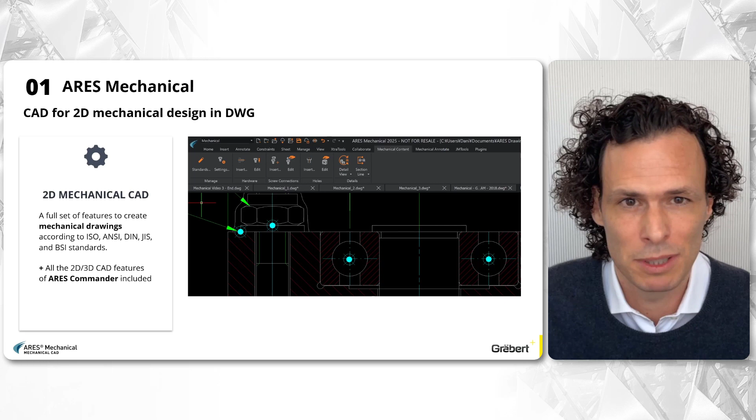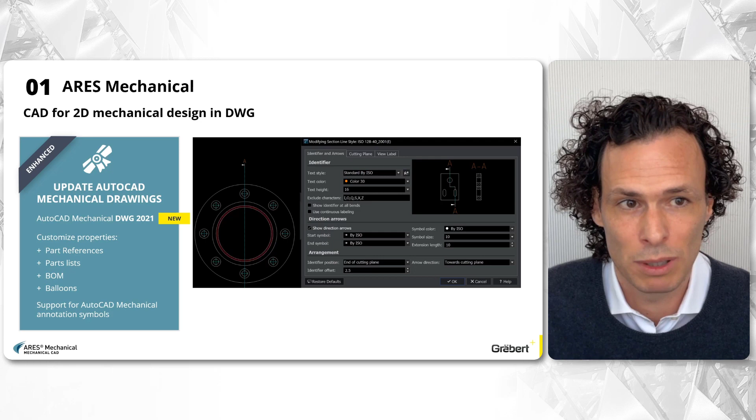Ares Mechanical is Graebert's solution for mechanical design that combines powerful DWG features based on Ares Commander and a full set of industry-specific features to quickly create or modify existing 2D mechanical drawings. Ares Mechanical can be used to maintain legacy mechanical drawings created in AutoCAD Mechanical and now supports up to AutoCAD Mechanical DWG 2021 file formats.

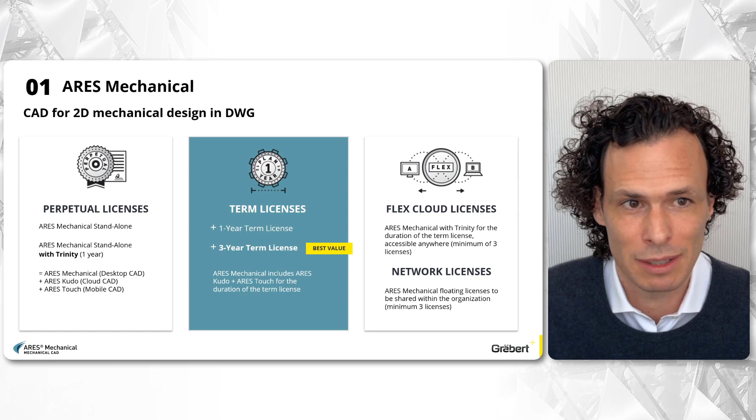A wide range of licensing options are available, including subscription, perpetual, network, or flex cloud licensing. The cost of Ares Mechanical is roughly 3 to 4 times lower than AutoCAD. Ares Mechanical is available for Windows 64-bit and in 5 different languages: English, German, Japanese, Korean, and Polish.

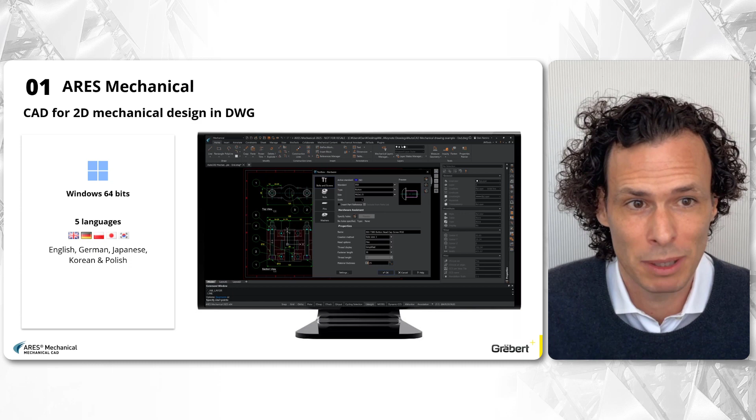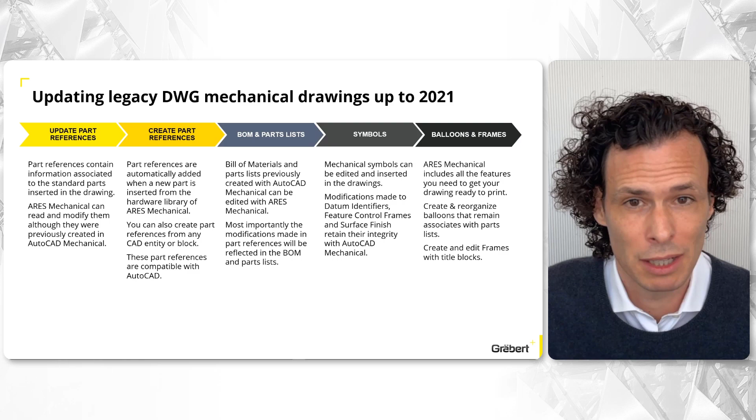Let's move on with some of the feature highlights included in Ares Mechanical. As previously mentioned, Ares Mechanical can now open and edit AutoCAD Mechanical entities. From this new release, we now support AutoCAD Mechanical DWG files up to 2021. This is important because Ares Mechanical offers an affordable and practical way to continue to work with these mechanical drawings created in AutoCAD Mechanical without being forced to use only one CAD product.

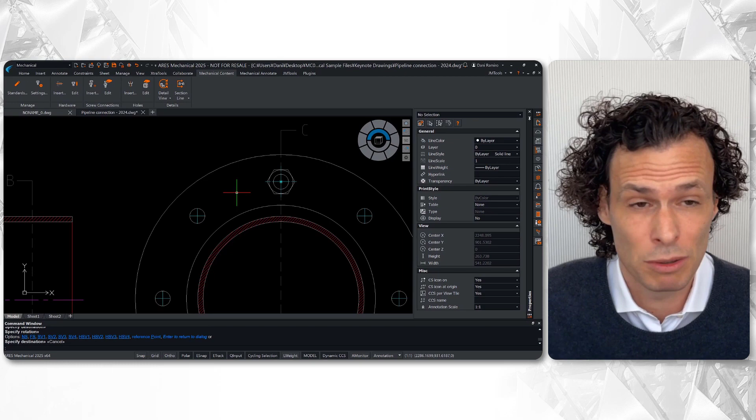Once the DWG is loaded, existing part references, part lists, bills of materials, balloons, and symbols are natively supported and are fully compatible with AutoCAD Mechanical. Our customers commonly need to update part information, part references, and produce updated drawings. With Ares Mechanical, these legacy files can be updated and maintain their compatibility with AutoCAD Mechanical when saved. We will dive deeper into these highlights later in the presentation.

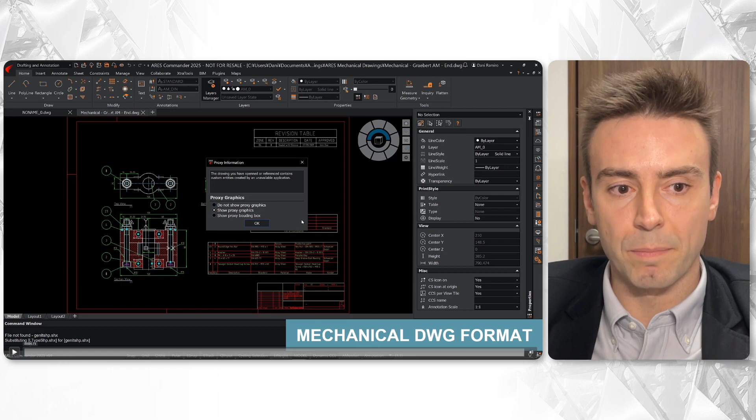It is important to note that standard DWG files are actually different from AutoCAD Mechanical DWGs, as the latter contain special types of entities. Danny, can you elaborate a little bit more on this aspect? Sure, let's look at an example. Opening an AutoCAD Mechanical DWG in standard DWG programs like vanilla AutoCAD will prompt that there are special custom entities in the file. As the source application is not present, the custom objects are turned into proxy entities.

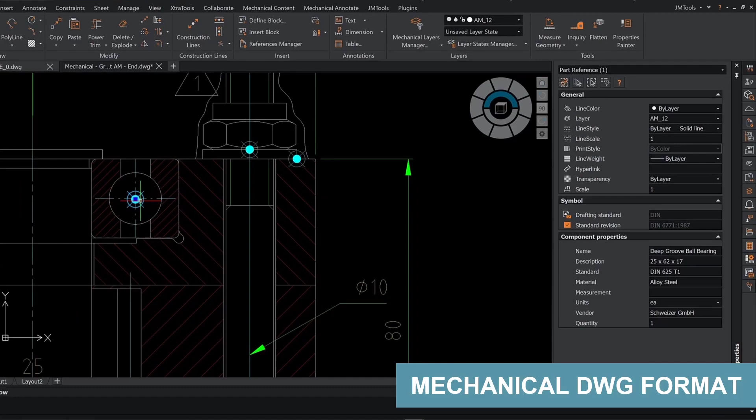While standard programs may not display part properties, Ares Mechanical recognizes these special types of entities, including their properties. These smart objects are beneficial for mechanical design, but they exist separately from standard DWG files. Ares Mechanical ensures compatibility with AutoCAD Mechanical for modifying and creating mechanical entities.

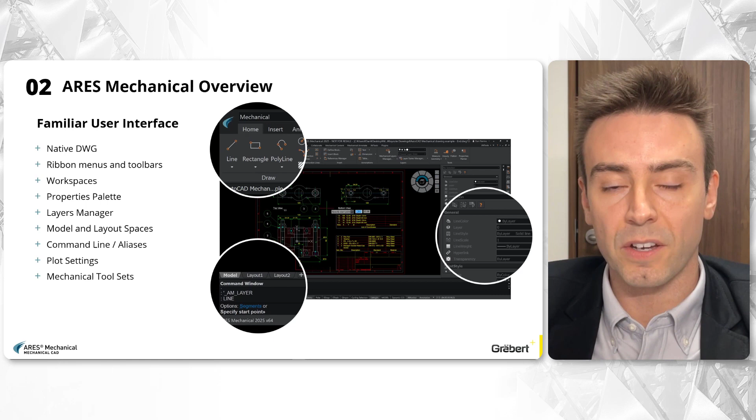Okay, with this explanation of the mechanical objects out of the way, let's continue with an overview of Ares Mechanical product features. Dani, please go ahead. Since Ares Mechanical is based on Ares Commander, it offers the same familiar user interface and all the features you may expect, such as working with ribbons or toolbars, workspaces, the command line, and much more. Ares Mechanical also offers a wide variety of compatible file formats, including native support for DWG, AutoCAD Mechanical DWG up to 2021, PDF, and some of the most common 3D file formats such as STEP and IGES.

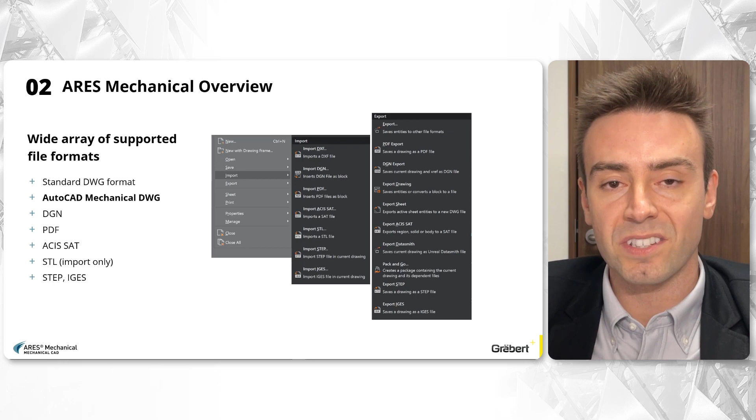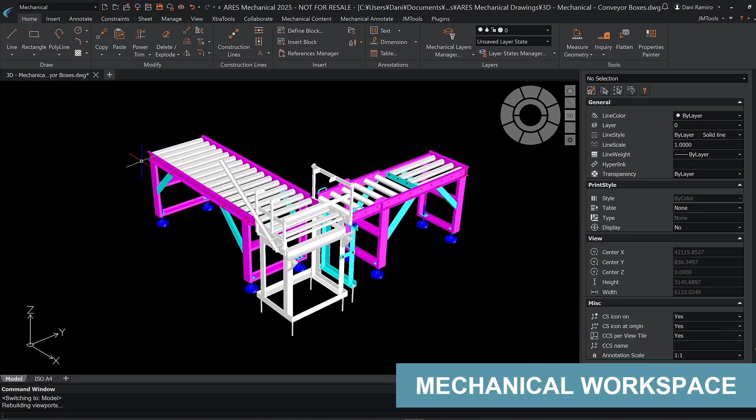Would you like to add something, Robert? Sure. Ares Mechanical includes a mechanical workspace that contains a specialized set of tools for mechanical design. These standardized tools are crucial to keep consistency across design, drawings, and manufacturing processes. And since these tools support AutoCAD Mechanical DWG files, it enables seamless interoperability without compatibility issues, facilitating collaboration and integration.

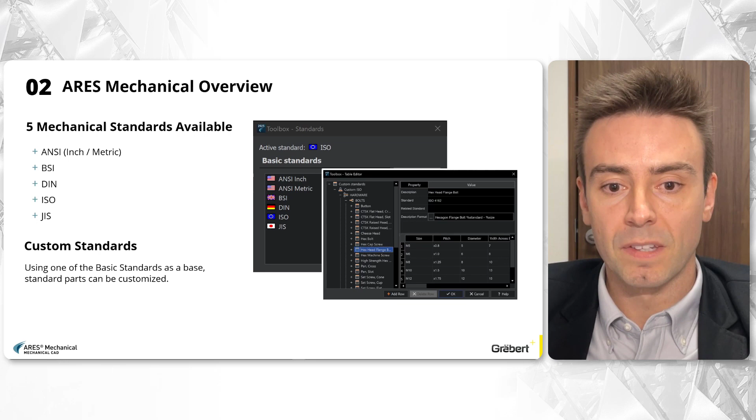Thanks, Robert. Using mechanical standards offers great benefits, such as consistency, efficiency, and cost reductions, minimizing errors. With that in mind, Ares Mechanical assists with the creation of mechanical drawings according to all the leading standards, including ANSI, both imperial and metric, ISO, DIN, JIS, and BSI. Additionally, you can create custom versions of the standards for your company.

Ares Mechanical includes a layers manager and the support for layers groups. Layers will be automatically created and organized as required in the standard chosen for your drawing. Can you tell us a bit more, Robert?

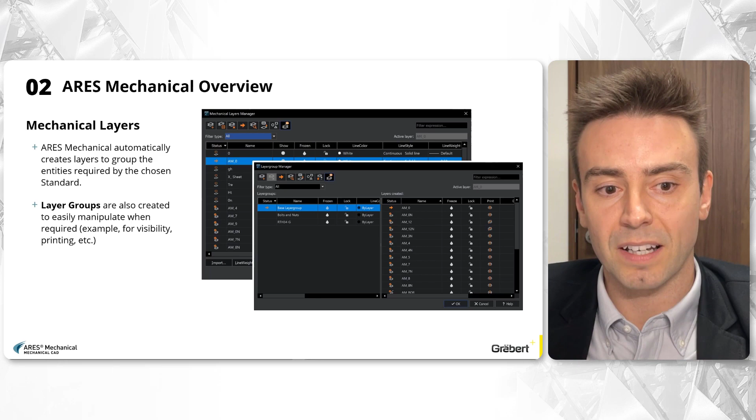Sure. The support for layer groups is also included for compatibility with legacy AutoCAD Mechanical drawings, where this feature is commonly used to separate layers by parts. All the common layer manipulation operations are available, and you can convert a selected layer into a mechanical layer.

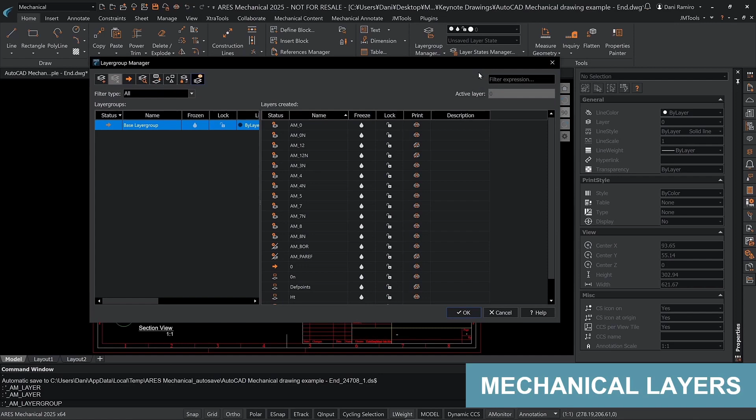These mechanical layers offer significant time savings as they simplify the process to show or hide elements and groups for printing. Besides, you can import such layer settings and properties from another drawing template, or layer settings configuration file.

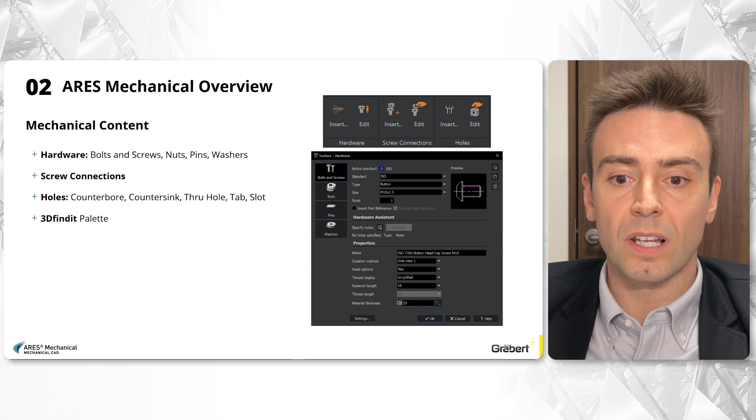Thank you. As previously said, having a standardized mechanical content for mechanical design and manufacturing offers several benefits, such as consistency and efficiency. Ares Mechanical includes standard mechanical parts to produce accurate drawings, such as hardware, screw connections, and different hole types. Users can also leverage thousands of mechanical parts using the 3Dfindit palette.

Here, we will have a look at the different hardware options available. Users can choose between bolts and screws, nuts, pins, and washers. In this example, we will insert a heavy hex bolt, selecting the appropriate size using the near side view and typing the material thickness. We can also choose to insert a part reference at the same time.

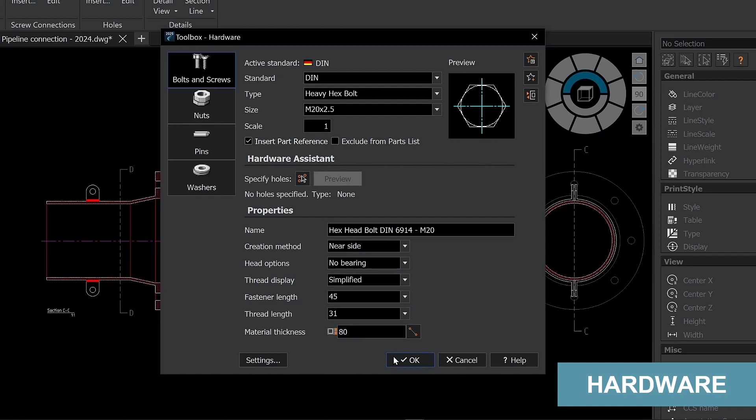In addition, users can add their preferred parts to the favorite library for easy access. Now, let's go ahead and insert the bolt, noting that a part reference has also been inserted.

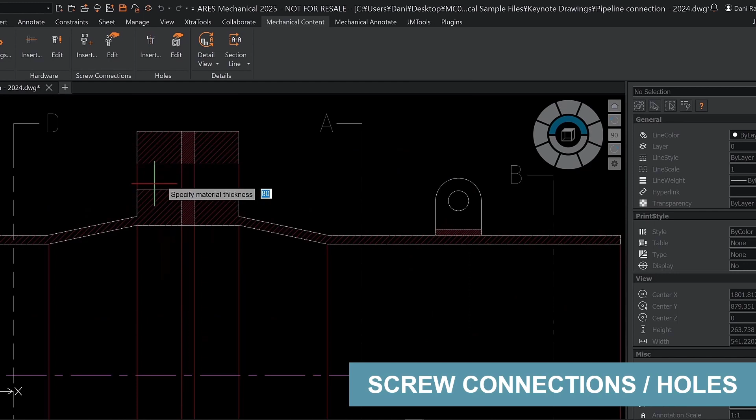Screw connections can also be inserted following similar steps. We select the type, size, the thickness, but this time selecting 2 points, and the fastener's length. Screw connections can also be configured to include or exclude its washers and nuts, and even choose to insert part references. In addition, we can add hole entities to show, for example, where to drill plates. Holes can also be created in a top or side view.

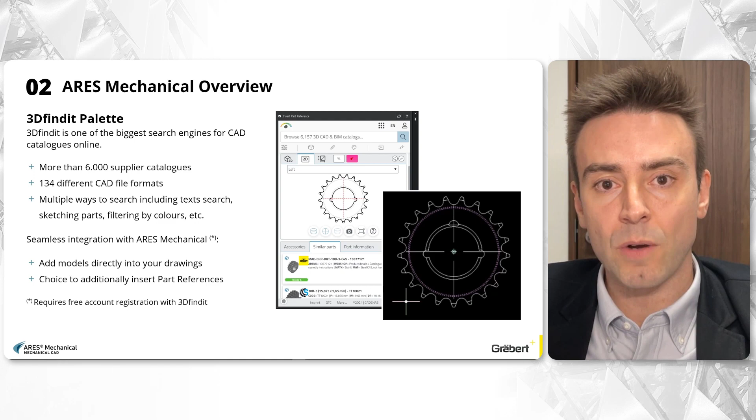3Dfindit is one of the world's most popular visual 3D search engines for manufacturers' components. Users can find the parts they need in seconds from thousands of catalogs. There is no need to browse through thousands of manufacturer websites or catalogs. You can harness 3Dfindit's powerful search tools via the 3Dfindit palette directly inside Ares Mechanical.

Use your 3Dfindit account and start exploring part catalogs from all over the world. Then insert different views directly to your drawings, and even with the choice to insert a part reference at the same time.

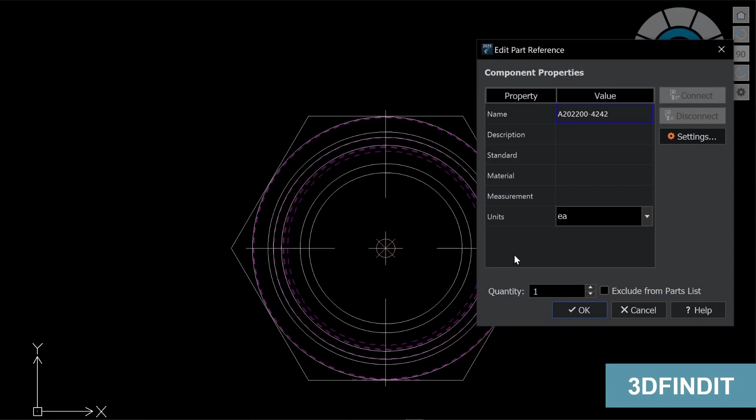Great. Let's continue with mechanical annotations. Mechanical annotations play a very important role in communicating vital information throughout the design and manufacturing process. These are also providing clear and precise instructions that help to prevent misinterpretation and reduce the risk of errors during the manufacturing process. Ares Mechanical includes different standardized mechanical annotations that can be read and modified with AutoCAD Mechanical. Dani will further explain how these mechanical annotations work.

Let's start with part references. Part references are represented using blue points. We can edit part references coming from AutoCAD Mechanical. Furthermore, clicking the Settings button will allow us to customize the fields, adding, for example, the vendor. It is also possible to customize any of the display prompts or descriptions. These modifications will be seamlessly interpreted by AutoCAD Mechanical when saved.

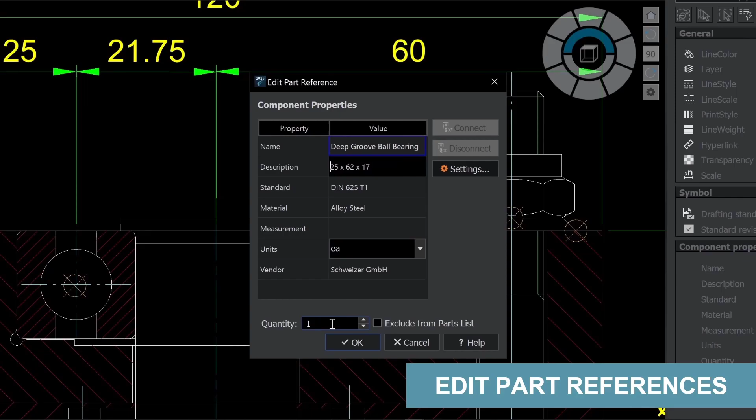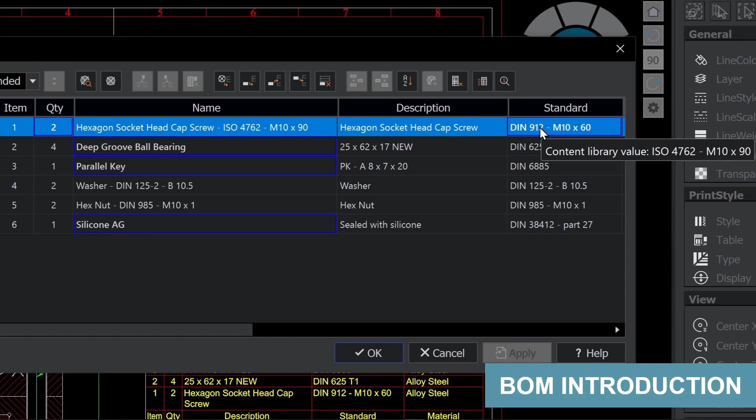In some cases, there is a good reason for that. For instance, our drawing follows the DIN standard, and this part was inserted with the ISO reference, so we entered the DIN equivalent. Similarly, we want to keep the same name overrides because originally these were empty.

To continue, let's insert an item directly inside the BOM. We will add a new row to include the bearing housing, then select the row, then we click on Create Part and select the entity. The part reference is inserted. We haven't talked about balloons yet, but these can also be created directly from the BOM.

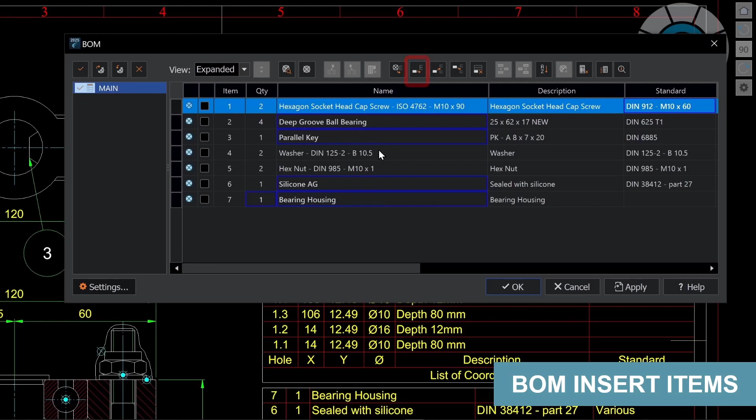Items with no part refs linked can also be added to the BOM, such as painting in this example. Other handy features include import and export to CSV, add or remove columns, and highlight geometry associated with the BOM.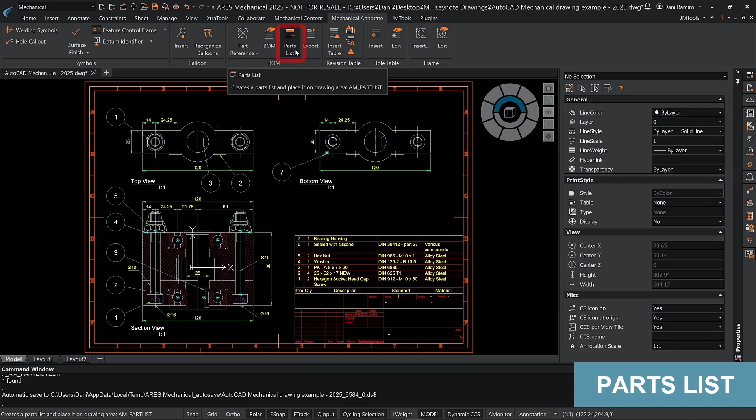Okay, so after configuring our BOM, let's have a look at the parts list. You can insert the parts list using the feature in the ribbon, but in this drawing, the parts list is already inserted, so we double-click on it. To begin with, we will insert the name and the vendor columns that I see are not showing.

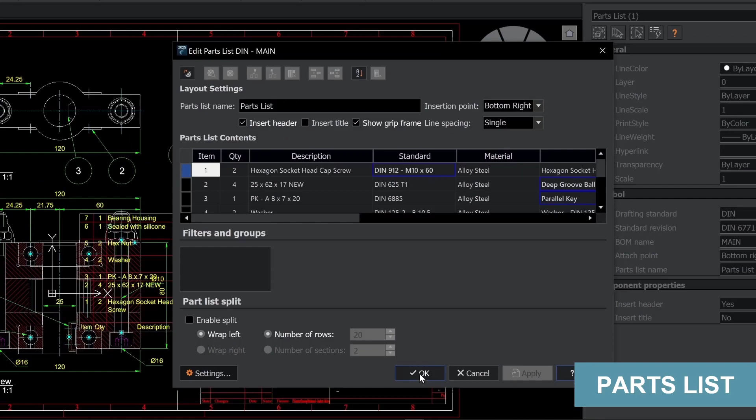Note that we can only insert columns for fields enabled in the parts reference dialog box. Settings can also be customized, such as the insertion point, text, and margins. Modifications made in the parts list dialog will be highlighted with a blue border, as we will be overriding the original values described earlier.

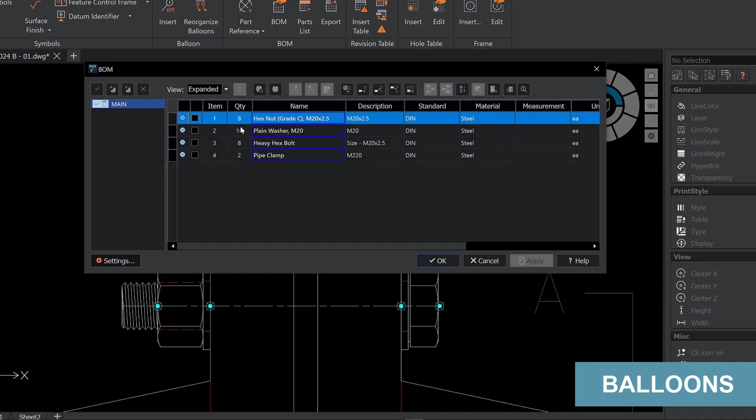Next, let's talk about balloons. There are several ways to insert balloons. You can select part references one by one, or you can create multiple ones using the Insert Balloon command. From the BOM, you can also create balloons for included part references. Once inserted, these balloons can easily be reorganized, and their type and arrowheads can be customized to align with various standards, as you can see in this video.

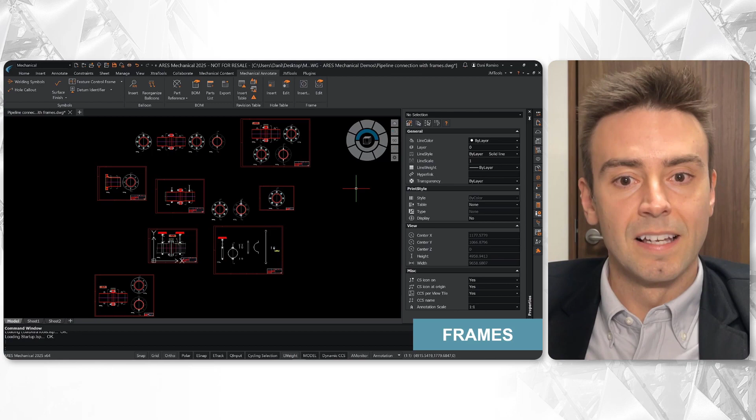Okay, next let's talk about frames. A mechanical drawing, just like any technical drawing, needs to be represented with sheets that will be configured for printing. Sometimes draftspersons are used to working with multiple frames in the model space for better organization. When creating a new frame, the standard will be automatically selected. We can select the frame paper size, title block, or preferred scale from the list of options.

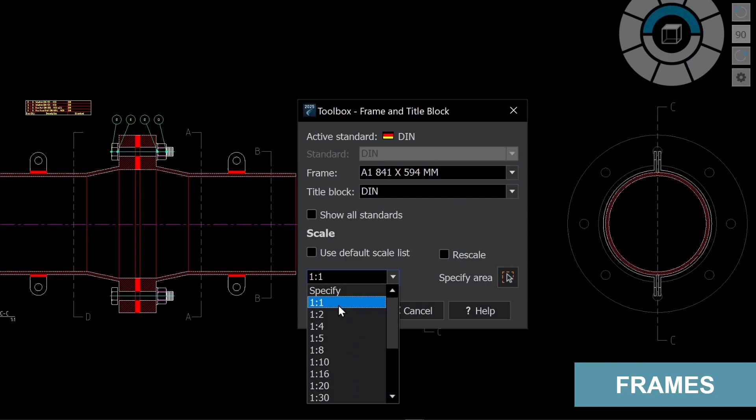When inserting, a dialog will appear to enter the title block details. Users can also edit already inserted frames, such as changing the frame size or scale. It is also important to note that layout views can also be created, as shown here.

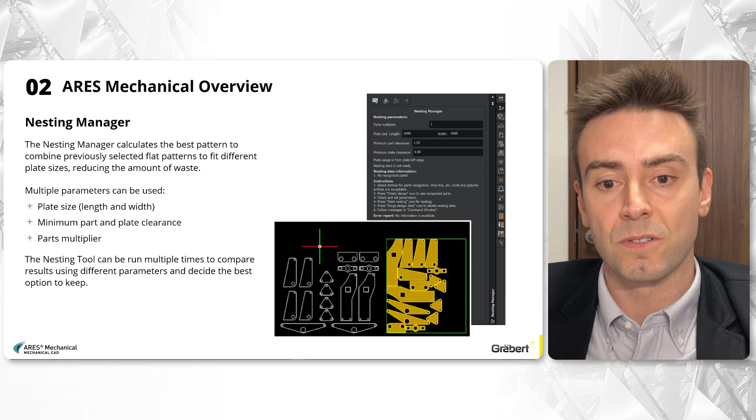Now, let's talk about the Nesting Manager. Traditional 2D CAD software relies on manual methods for preparing drawings for metal cutting, but the Nesting Manager offers precise automated nesting, minimizing scrap and optimizing part placement. It's user-friendly, handles complex nesting efficiently, automatically creates multiple copies with the part multipliers option, and supports various sheet sizes for comparison. Now, let's see how it works.

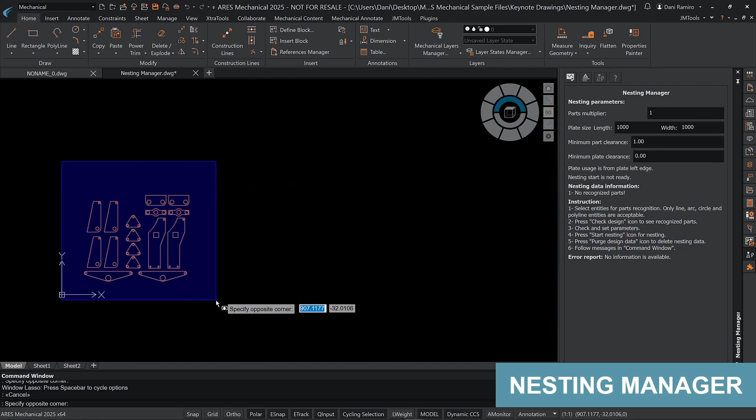Since many shops have a variety of custom plates in stock, it can be tedious to create a nesting setup for every job. The Nesting Manager makes it easy to find the best solution by creating multiple nestings. Now we select the parts, then configure the plate length to 500 by 600, leaving the minimum part and plate clearance values as 1 and 0 respectively. Then we click on Check Design to verify the nesting is possible and start nesting. In a few seconds, the first option is ready.

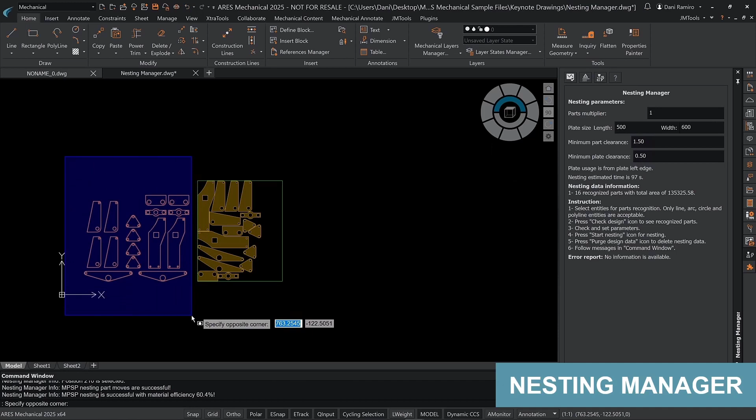Next, we select the parts again, now setting the plate as 400 by 800. Then we click on Check Design, and then we start nesting again, and in a few seconds we will see the second option ready. Users can then choose the best option for them.

All right, thank you, Dani, for giving us an overview of the Ares Mechanical product features. There's a lot. Now let's focus on the new features we're actually shipping with Ares Mechanical 2025. The team has been busy, and you will see we continue to bring new productivity tools to the product.

Thank you, Robert. With the new features, we will start by mentioning again that Ares Mechanical now supports AutoCAD Mechanical DWG files up to 2021. This means that mechanical entities such as part references, symbols, BOM, etc. can be opened and modified in Ares Mechanical and vice versa, maintaining the legacy data.

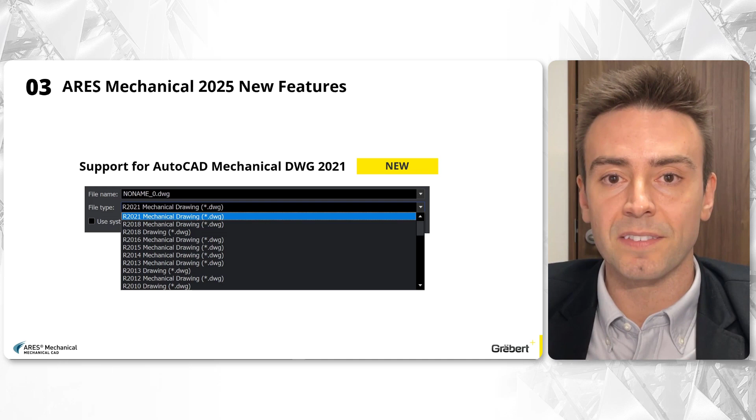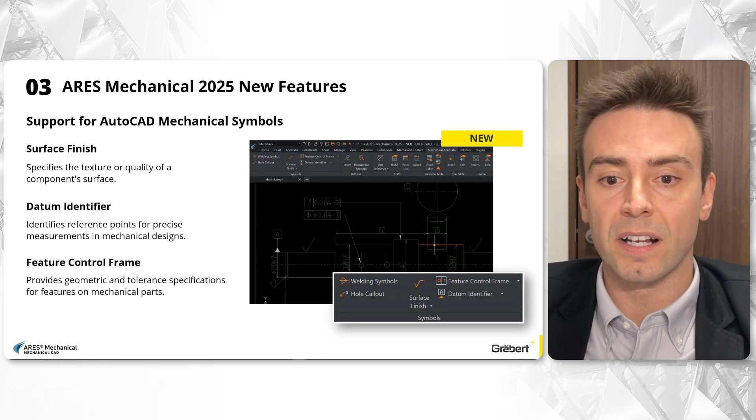Mechanical symbols are essential elements in engineering drawings. Surface finish symbols specify surface texture. Datum identifiers establish reference points for measurements, and feature control frames provide geometric and tolerance specifications for specific features, ensuring precision and functionality in mechanical designs. Ares Mechanical 2025 now supports AutoCAD Mechanical DWG files that include these types of mechanical symbols, as we will show.

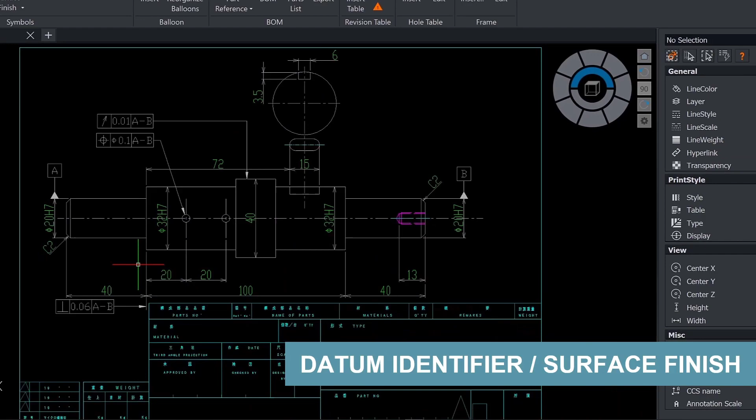In this demo, we have received the drawing of a shaft created in AutoCAD Mechanical. First, we will attach a datum identifier to the 20 mm diameter dimension. We can also customize the settings as we wish, such as the arrowhead, text height, etc. Next, we will add a new surface finish symbol to the same cylindrical feature, denoting a roughness average of 6.3.

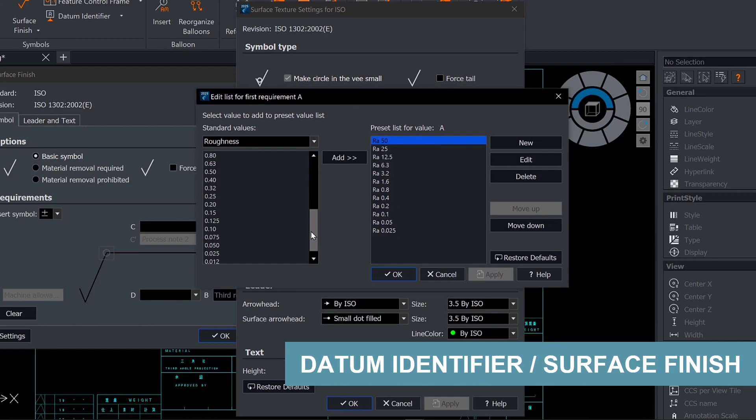In the Settings dialog, other parameters can be configured, including customizing the preset lists for surface finish requirements. We are adding new symbols to the drawing, keeping in mind that symbols created in AutoCAD Mechanical can also be modified.

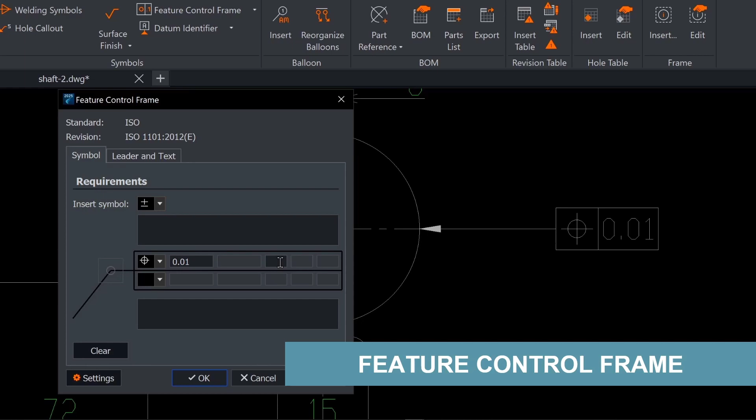We continue by inserting a feature control frame to the cylindrical feature viewed from the front. In the dialog, we select the position symbol from the drop-down list, type a tolerance value of 0.01, then input datum references A and B used to establish the orientation of the feature being controlled. Feature control frames created in AutoCAD Mechanical are now supported and can be modified.

Ares Mechanical 2025 will also now recognize detail views and section lines created in AutoCAD Mechanical, letting users modify or create their own.

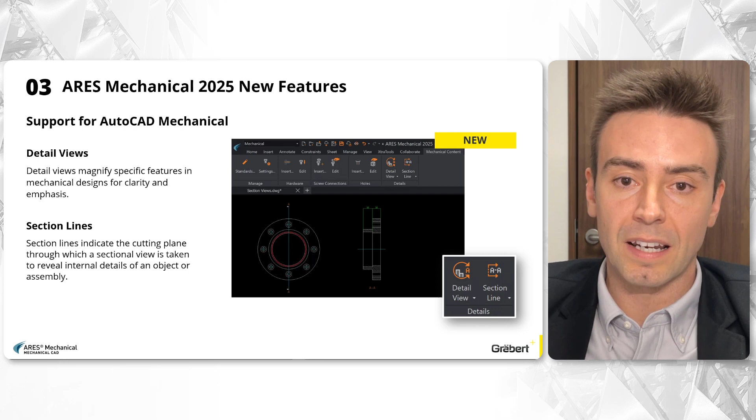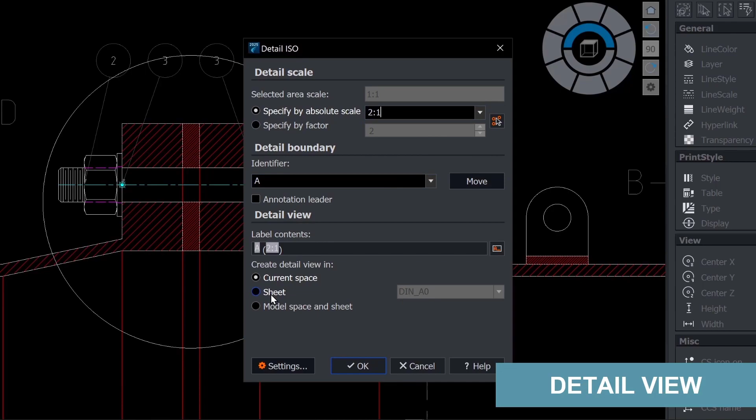Detail views serve as magnified snapshots that focus on specific areas of a mechanical component or assembly. By isolating specific regions or components, detail views facilitate clearer communication of design intent. In Ares Mechanical, users can now create or modify detail views previously created in AutoCAD Mechanical, setting the scale, identifiers, and whether to add it to the current space, available sheets, or both.

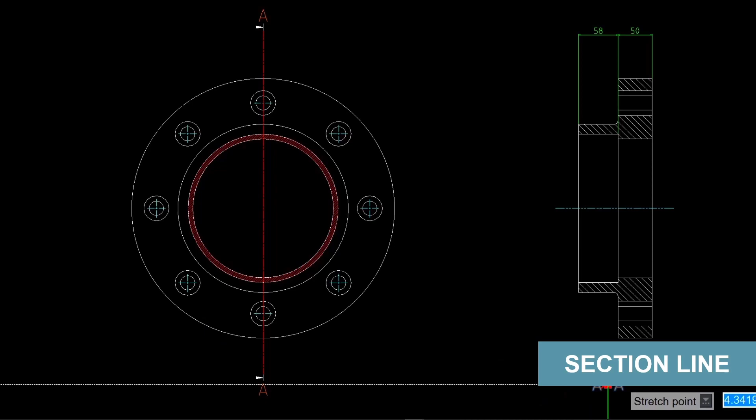Section lines indicate the cutting plane through which a sectional view is taken to reveal internal details of an object or assembly. These provide clear insight into internal structures, enhancing understanding and decision-making in mechanical engineering design. ARES Mechanical now supports section lines created in AutoCAD Mechanical, so users can create or modify its properties directly from the dialog box by double-clicking the entity or using the Properties palette.

Mechanical drafters frequently invest significant time detailing mechanical parts. With this in mind, we've developed a new suite of tools designed to dramatically reduce time and streamline the preparation of these drawings. Let's explore a selection of these useful tools.

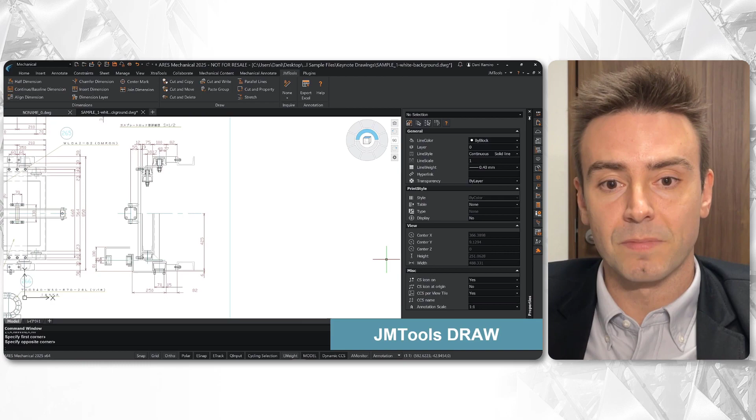Managing small, intricate parts can pose challenges for drafters. To simplify this process, we've introduced a new collection of convenient tools. Here, we run the cut and copy command, choosing a polygon as the selection option. This allows copying selected parts within the same drawing, with the option to do it at different scales, or even copying and pasting between drawings, as shown in this example.

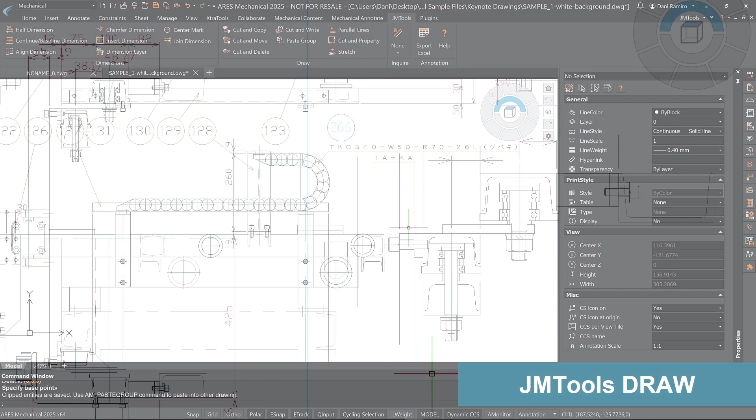These tools are particularly handy because they automatically select the contents within the designated area without the need to trim or change any of the geometry.

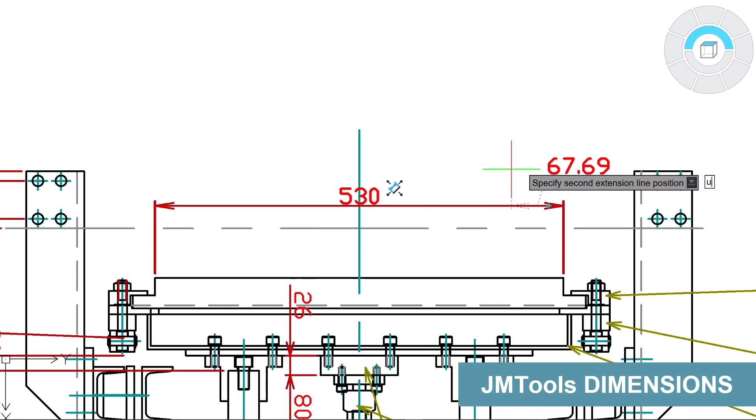Using the Continue Baseline Dimension tool, I can easily create continuous measurements. Pressing the U key jumps to the next stack dimension, simplifying the insertion of evenly spaced references. After inserting the measurements, we can seamlessly connect or divide them using the Join Dimension or Insert Dimension tools. These efficient tools save valuable time by eliminating the need to delete and reinsert dimensions in case of errors.

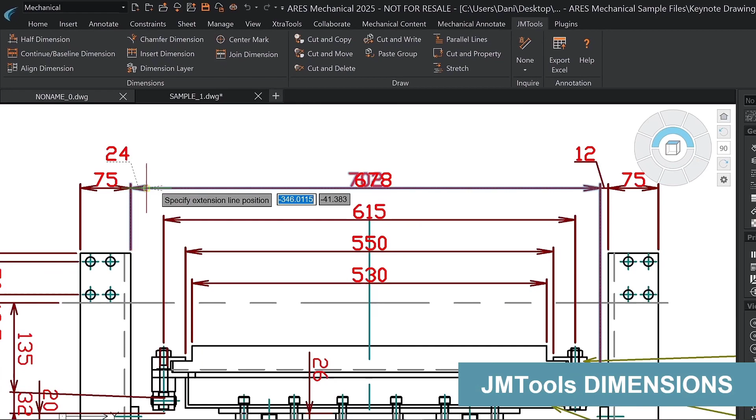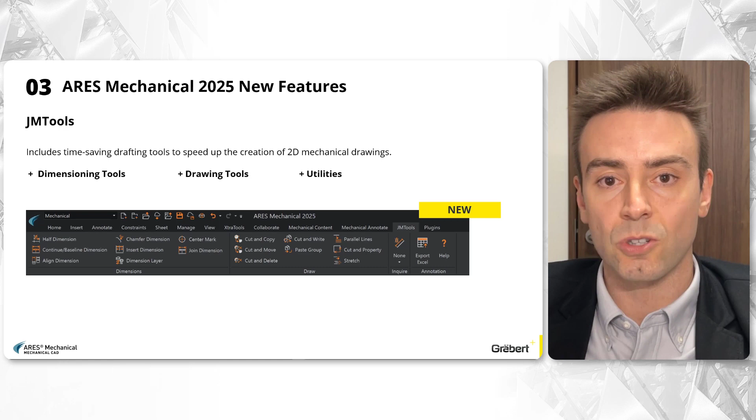We've showcased just a glimpse of the powerful tools available with the new JMTools ribbon. You can dive into the full array of features when installing ARES Mechanical 2025.

Thank you, Dani. To summarize, ARES Mechanical 2025 offers these new features. First, ARES Mechanical now supports AutoCAD Mechanical files up to 2021, with expanded support for mechanical entities with surface finish symbols and datum identifiers. We can now create detail views, and section lines are there to identify when the cutting plane cuts the material. Further, as a unique capability, we have enhanced dimensioning and drawing tools with the JMTools. I can't wait for you to try all these new features.

So let's now briefly discuss how the world's leading cloud and collaboration features that ARES Mechanical with Trinity offers. Because ARES Mechanical is based on ARES Commander, users on maintenance can also benefit from the ARES Trinity features for cloud and collaboration. Some of these include synchronizing files over the internet using your preferred cloud storage service, and view-only links, comments, markups, email notifications, and more.

However, it's important to note that at this point, the mechanical features for editing and modifying mechanical objects are currently not accessible in ARES Kudo or ARES Touch. Dani will now showcase a practical real-world user example.

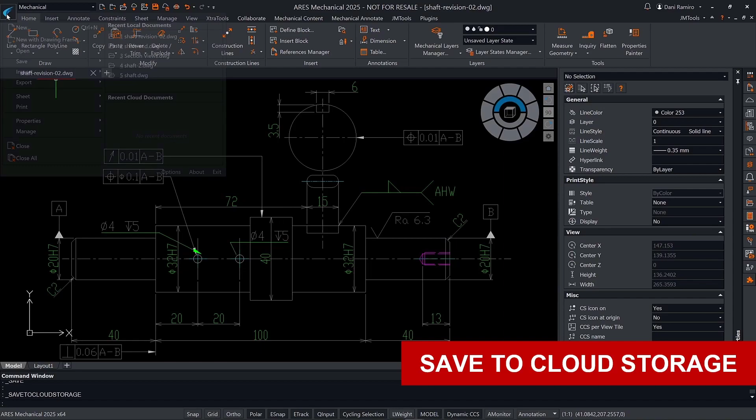Here is one handy use case about the benefits of using the Trinity features. I will start by saving this file to one of the cloud storage services I have connected. After uploading the file, it allows me to access the same file in ARES Kudo in any web browser or on mobile using ARES Touch. I can even go full screen for a more immersive CAD experience.

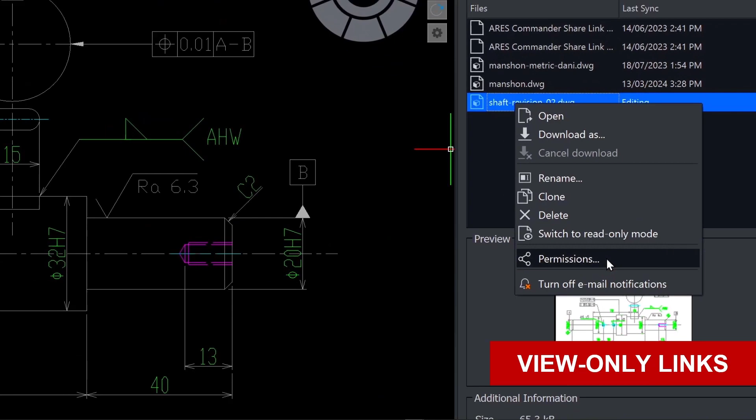Next, I will create a unique view-only link that will be sent to one of my colleagues. I can customize some options, such as allowing printing to PDF, expiry dates, or even set a password to view it. In this case, anyone with the link will be able to see always the latest updated version of the file, making it more secure than sending files via email.

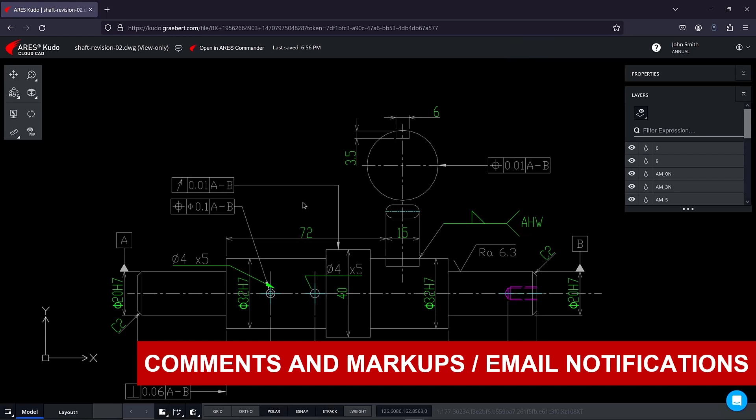Another benefit of sharing these view-only links is that users will be able to make markups and comments without altering the DWG file. This feature is available for free for any user logged in with their Graebert account.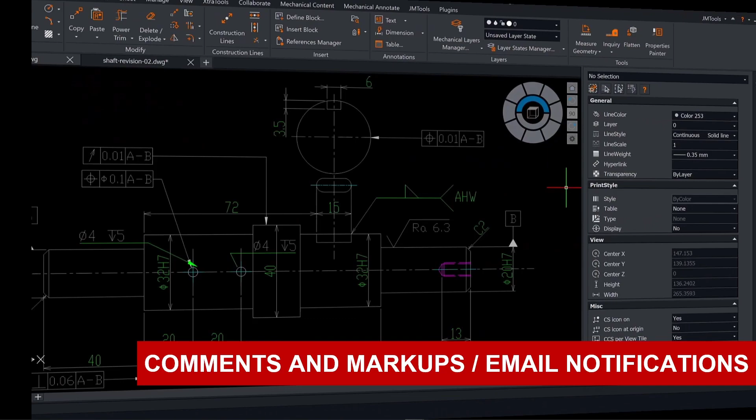Continuing with this example, my colleague is leaving a comment suggesting to add another datum identifier for clarity. Comments can also be linked to entities for better understanding. I will then receive an email notification informing about the comment that was left in the file I shared. Going back to ARES Mechanical, I will be able to see the comment and entity that was referring to.